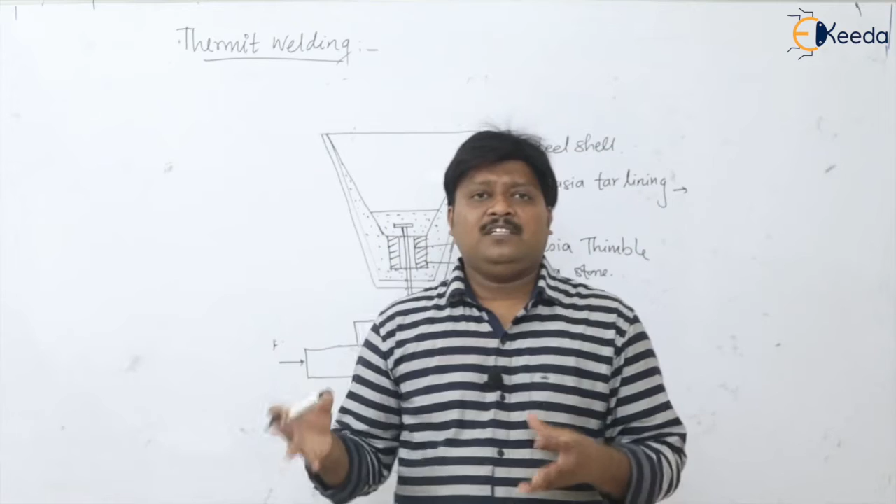This welding technique is basically used for joining locomotive rails, for large gears, and some failure parts which can be repaired. In that condition we are using this thermit welding.

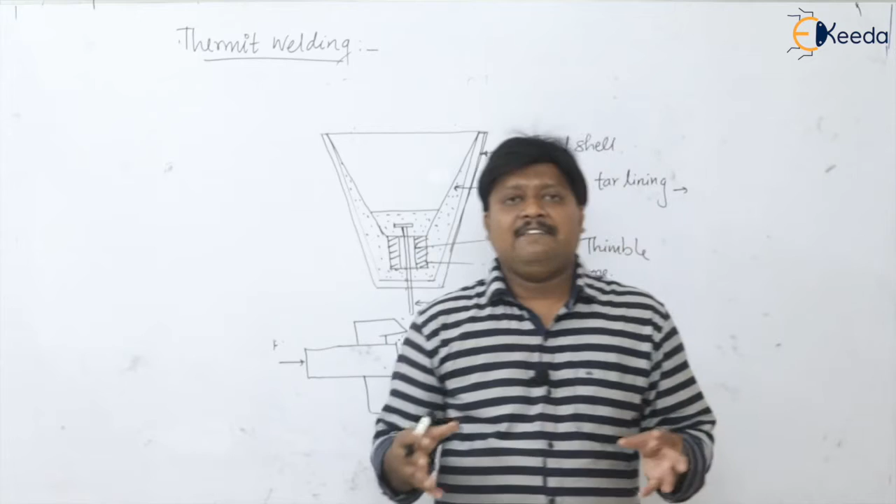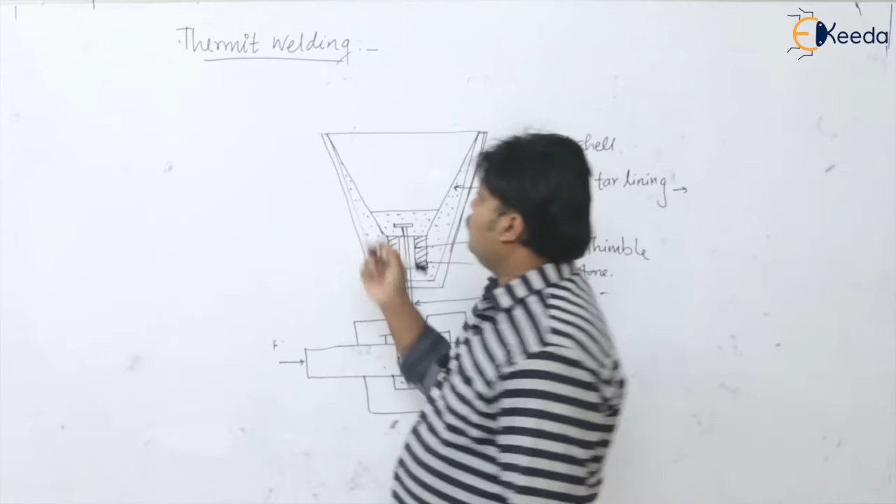In thermit welding, we have two chemicals, that is aluminum and iron oxide, and the mixture of these two is known as the thermit mixture.

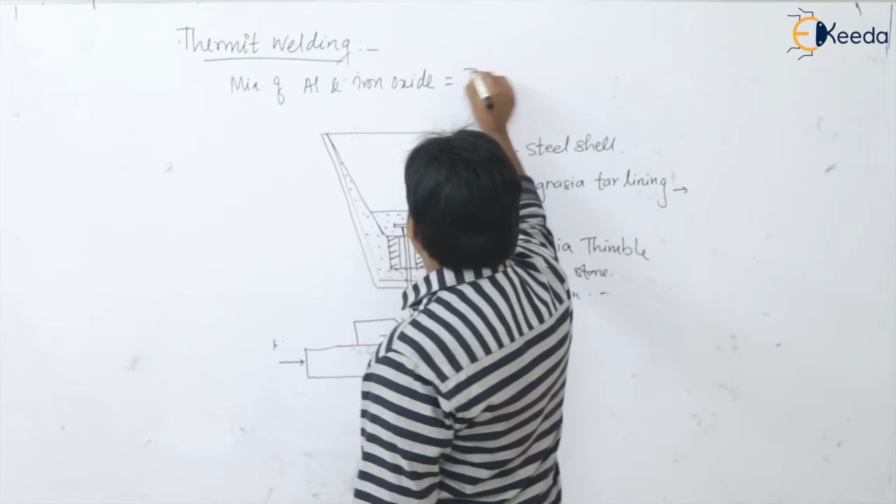This thermit mixture we are going to place in the crucible. This crucible is made up of a very thick steel shell, which is having the magnesia lining or magnesia tar lining. In that we have the refractory sand, then there is a magnesia stone, magnesia thimble, and the tapping pin for the supply of the molten material.

So it is kind of the filler material which is going to get into the joint and join the two pieces of the part.

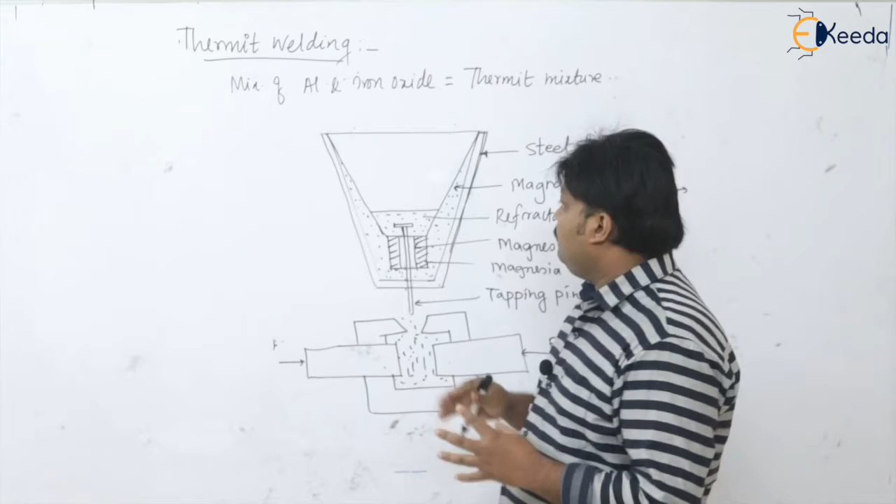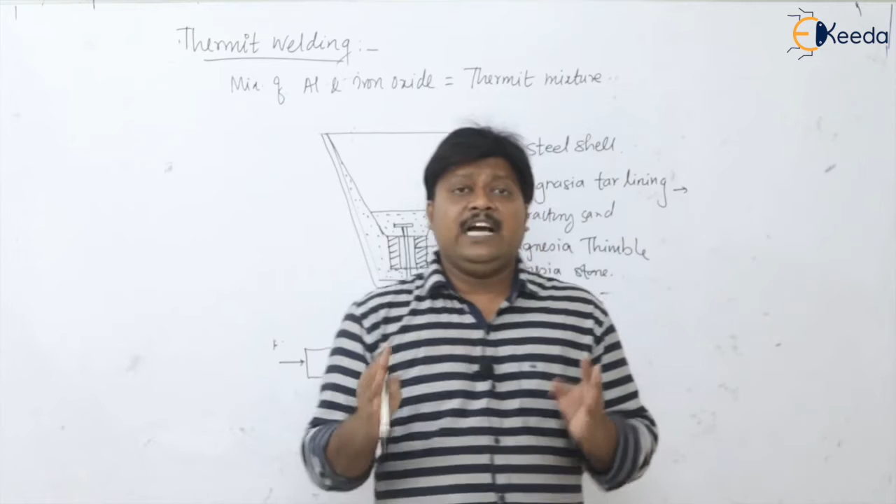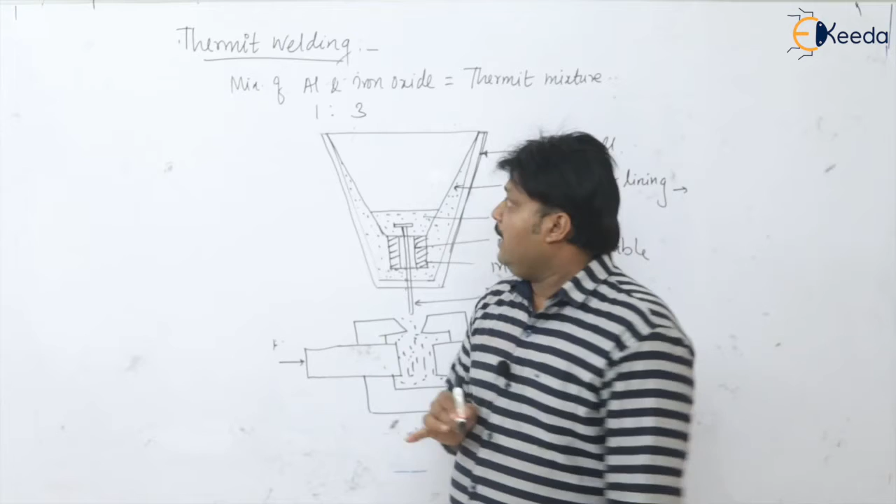If you look at the thermit mixture, there is aluminum around 1 kilogram, whereas the iron oxide we are taking up to 3.2 kilograms. So if you take the weight ratio of aluminum to iron oxide, it is 1:3 generally, and the heat that is produced comes from the reaction of this aluminum and iron oxide.

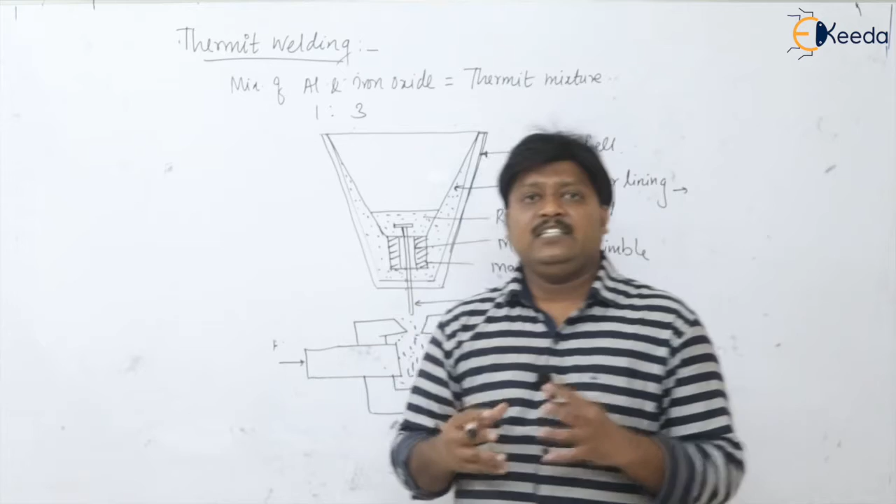This is the exothermic reaction. Please remember which reaction is going to happen: the exothermic reaction.

This heat produced by the exothermic reaction is utilized for melting the thermit mixture, and you get the molten metal. So these are the two pieces, and this is the kind of mold preparation we have done here so that we get this molten metal which will stay here, join this, and work as a filler material. It will come between the gap of these parts, get solidified, and make the joint.

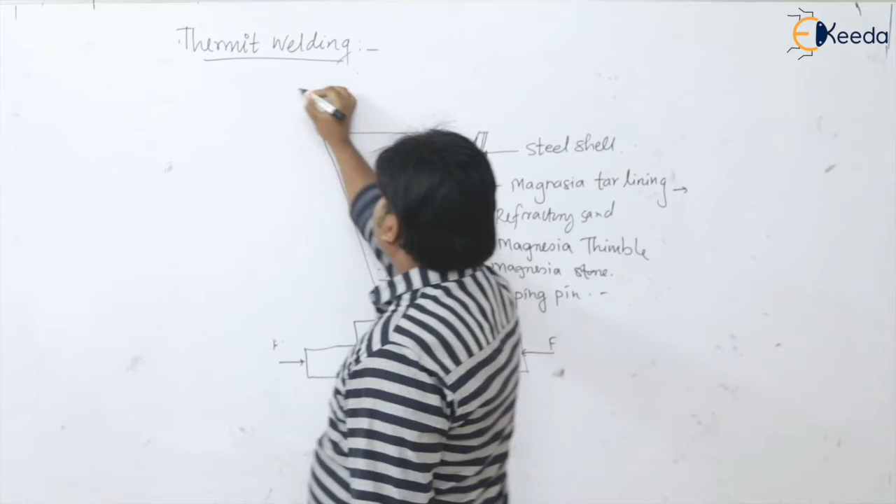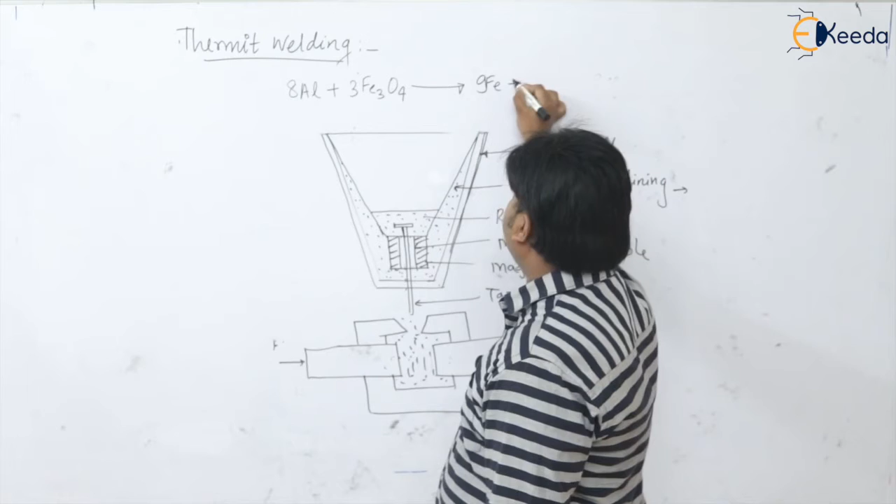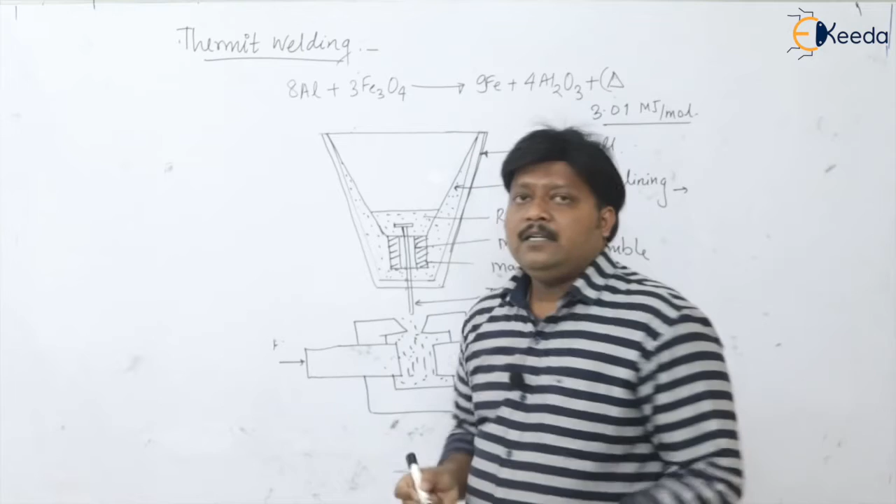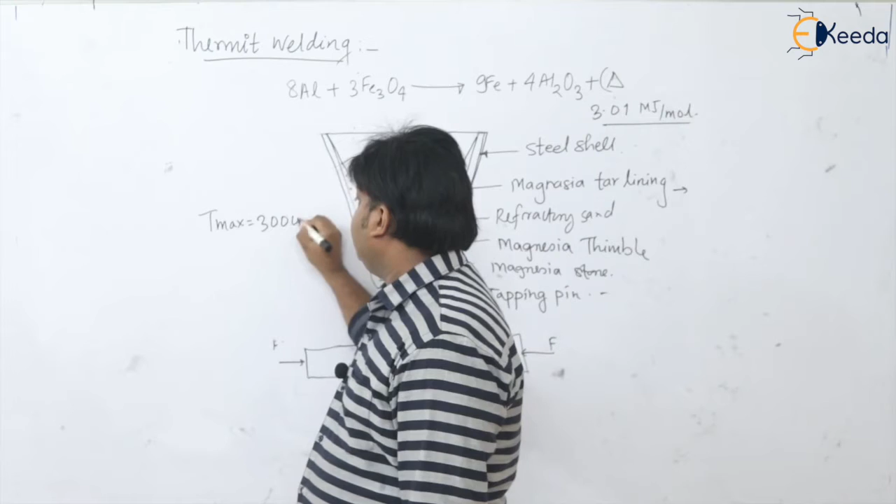What is the maximum temperature of the reaction? Up to 3000 degrees centigrade we will get the maximum temperature.

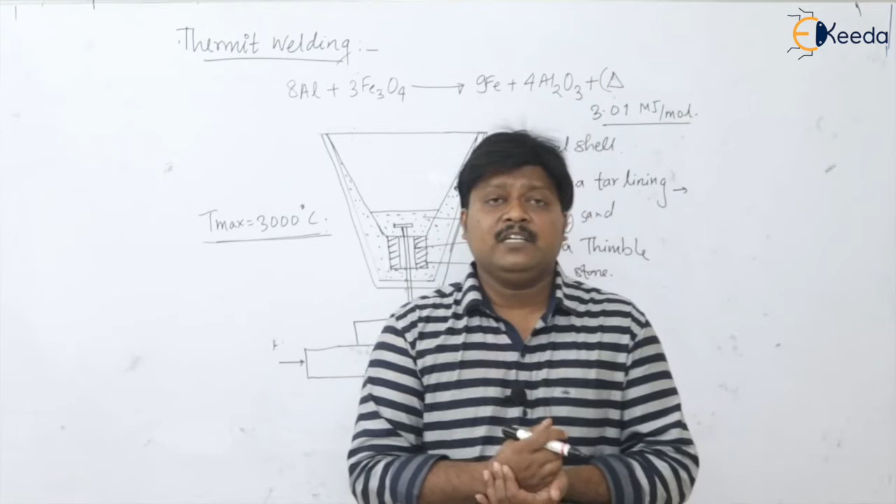So this is about the thermit welding, which is a chemical welding. Here aluminum and iron oxide, these two chemicals, and the reaction happens between them. But one thing to remember is that to set up the reaction of this thermit mixture we require some igniters. Please remember, the role of the igniter is very important.

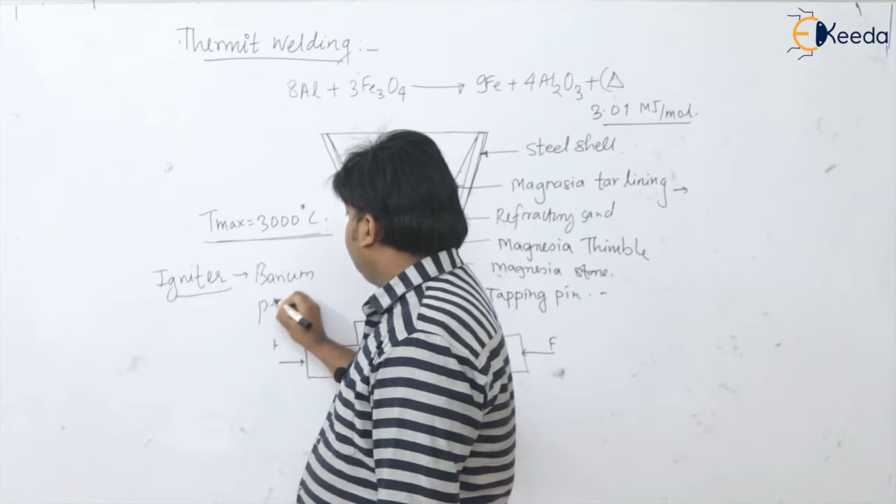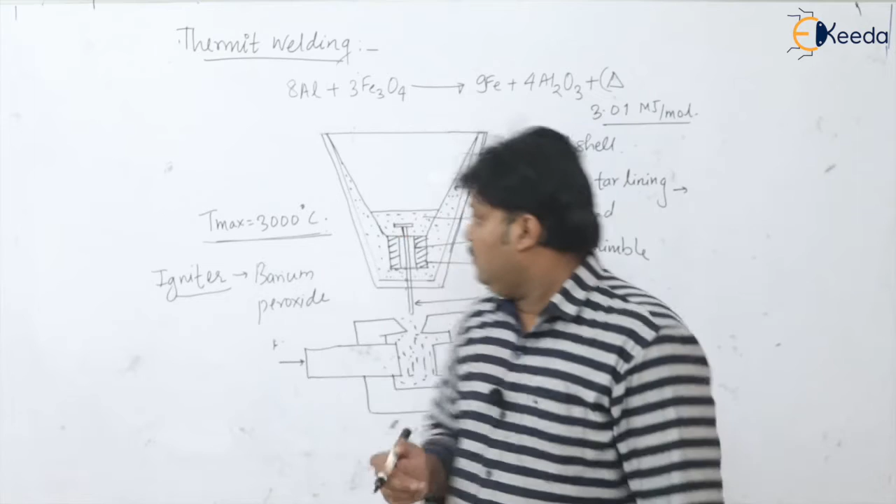The igniter is basically barium peroxide, or sometimes magnesium powder is sprayed onto the thermit mixture. So suppose I have filled this crucible with the thermit mixture. On top of this mixture we are placing the igniters like barium peroxide or the powder of magnesium.

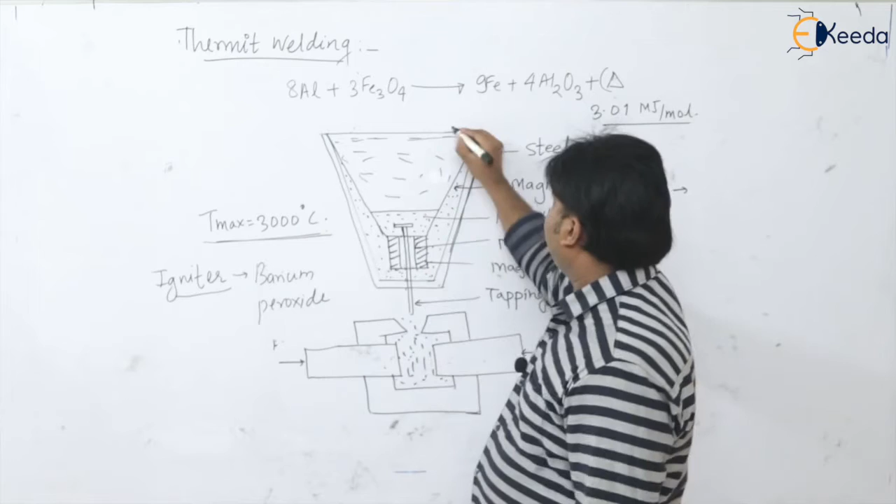We spread the powder on top, and now we ignite that mixture with the help of a metallic rod, which is at red hot condition at one end. The rod is long for safety purposes, otherwise wooden matches can also be used, but that is hazardous. That's why a long metallic rod which is red hot at one end is used, and we ignite the mixture.

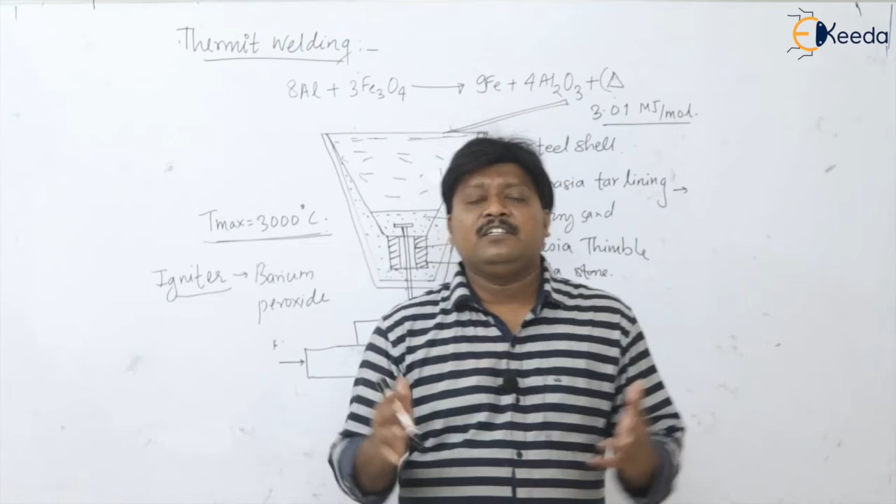To complete this reaction, around 25 to 30 seconds are required, irrespective of whatever amount of thermit mixture you have taken. So you need 25 to 30 seconds for the entire reaction to happen, and you get the molten metal at a maximum temperature of say 3000 degrees centigrade, which can be filled in the gap between the two parts taken for the joint, with a certain amount of force or pressure applied.

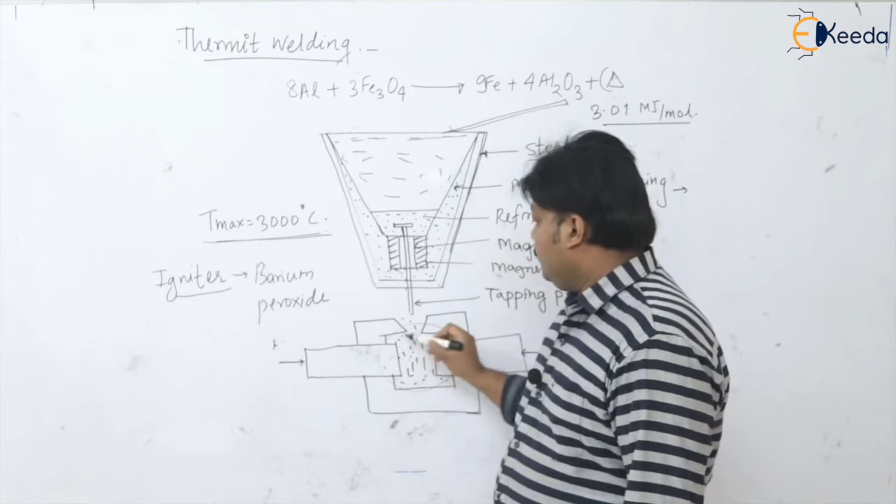So in this way this thermit welding is done. As I told you in the beginning, the process is basically used for joining locomotive rails, large gears, or wherever failed parts are there, to repair those parts also we can use this technique. So this is the information about the thermit welding.